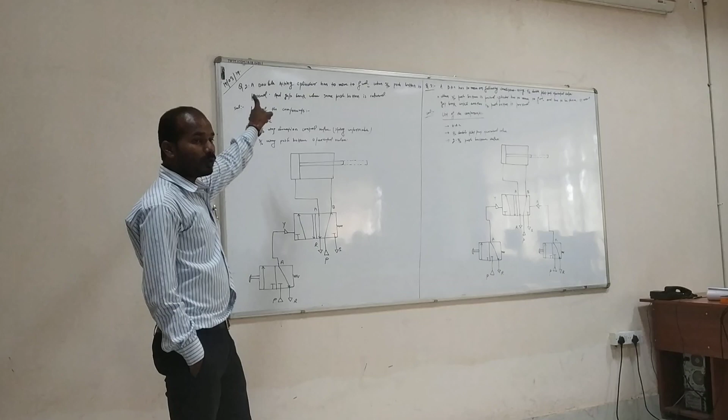So that is why we say there is a little change in the circuit, and this is what we are supposed to talk about today. We made two circuits and we'll see the difference between these two. First of all, before we start, I wanted to take you through this statement so that you could understand the purpose of making this circuit. Why did I make it?

This statement says a double acting cylinder has to move forward when the 3/2 push button is pressed. See, this is the state condition. When this component is activated the cylinder has to move, and it gets back when the same push button is released. So this is the statement. To fulfill the statement, what did I do? I made a circuit.

This circuit can be used for the same objective: to open the gate, to close the gate, to push any object, even for the sake of pick and place. These are the applications that can be performed out of this. So this is one example.

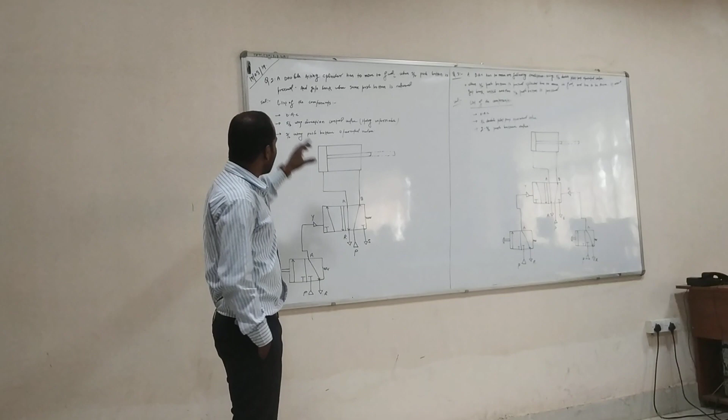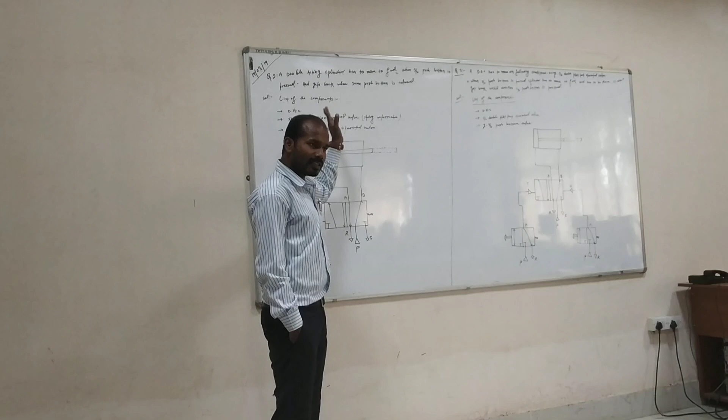Before making the circuit, we'll decide what components we require. That I did here, the list of the components. How did I confirm which components we require? Having read the statement, because in the statement things are crystal clear. A double acting cylinder has to move. So the output component is the double acting cylinder, and if it has to move, then some directional control valve must be there which will feed the pressure to the cylinder so that it could advance.

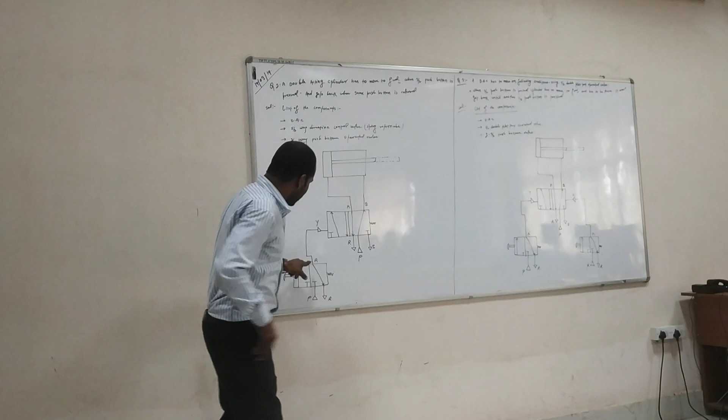So what are those components? It says 3/2 push button operated valve. It means the switching component is listed, but the directional control valve is missing from the question. So this is what we have to expect. The switching element is there, the output is there. This switching valve has only one port, whereas this has two ports, and this component has not been mentioned in the statement.

So how can one confirm? One can confirm by seeing these two ports, because the cylinder has two ports. So the component we require must have at least two ports, and that is the 5/2, because a 5/2 or a 4/2 has two actuation ports, but a 3/2 has only one. If you use only this one, how will you connect this output, which has two? That is why this interpreter must be in between, so that the connection can be established properly.

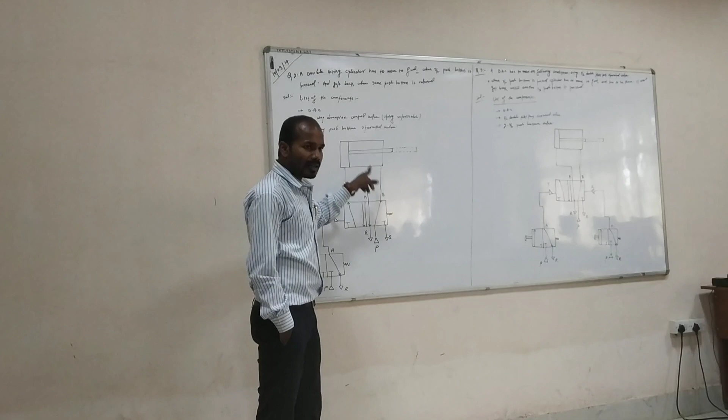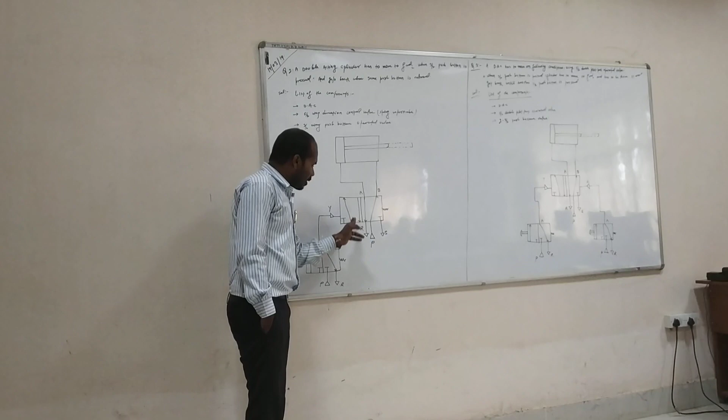Now the question arises, how will it move? You know the rest of the story, but I want to explain it. The moment you press, this state will override, P gets connected to A, pressure will reach the pilot, which will feed the pressure, and because of that this will override here. The moment it overrides, P gets connected to A because of this slant arrow. In the same fashion, because of this arrow, B gets connected to S.

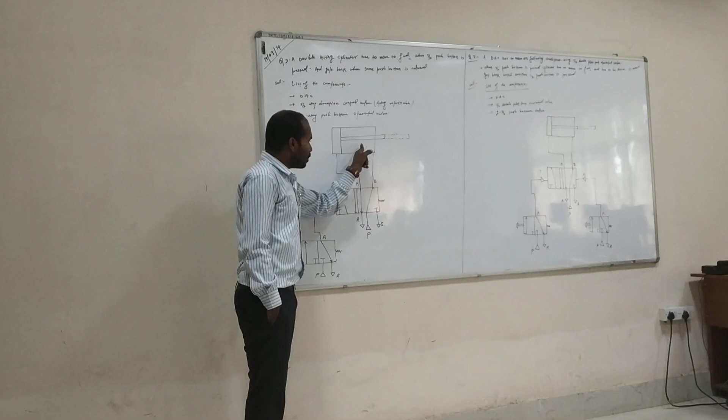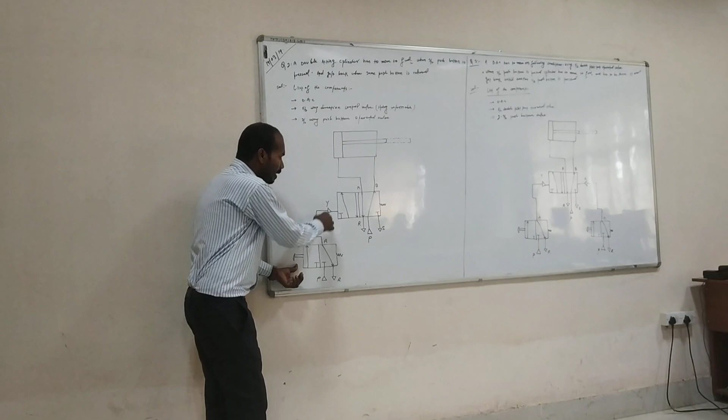So this pressure will be fed in this direction and act on this surface. Due to that, it will advance forward, and the pressure available in this chamber will release from B to S, and because of that the cylinder moves forward. But the moment you leave, what happens? It gets back to initial because of the spring, and the moment it gets back, there is no pressure here, and because of no pressure, this will act in the same manner. This results in the cylinder getting back.

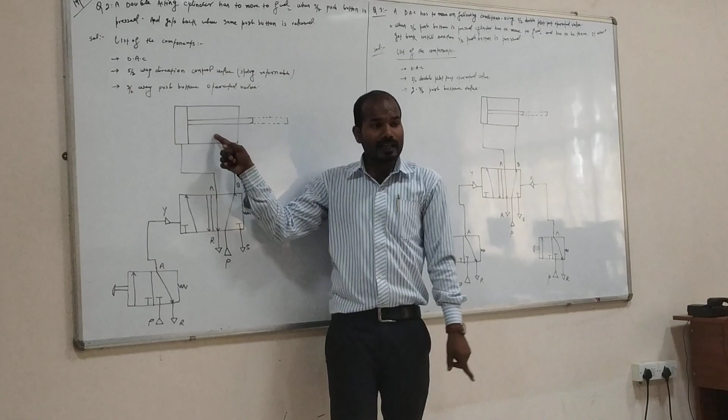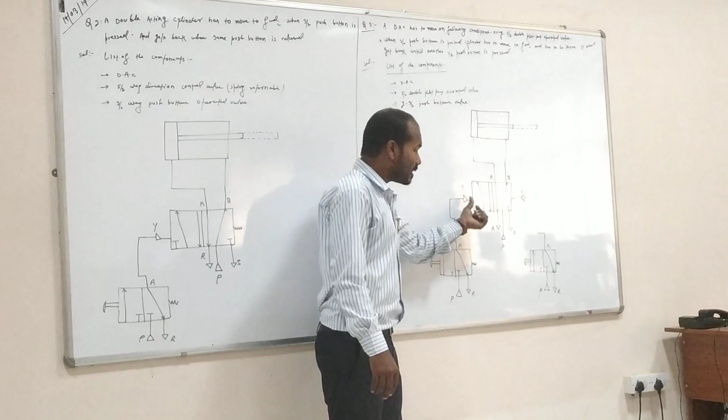In the same fashion this cylinder moves, but there is a slight difference. That one had only one switching element, but this has two. This has a double acting cylinder, this too has a double acting cylinder. One more difference: that was a 5/2 single pilot operated valve, but this component is a 5/2 double pilot operated valve. So what change will take place?

The statement says when the 3/2 push button is activated, the cylinder has to move forward and stay there. It means once you activate, it goes forward and will stop there, and will not get back even when released, like it was getting back before.

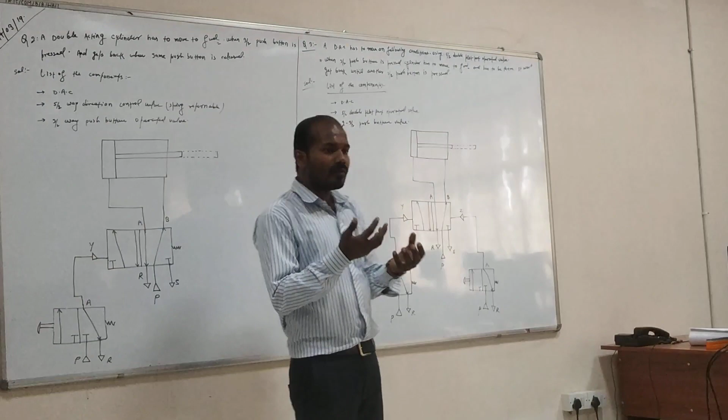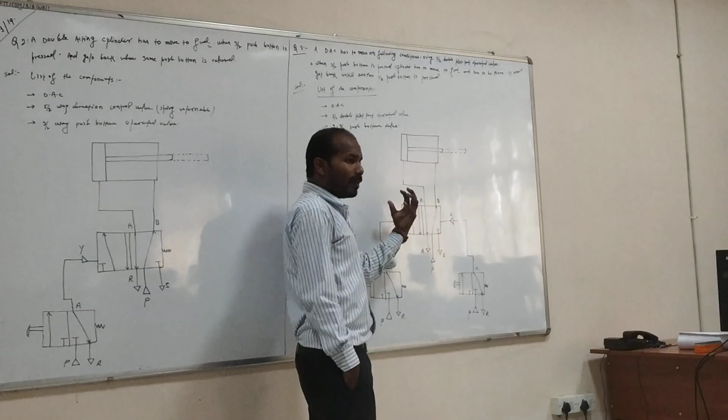So for that, what did I do? I took another button that will feed the valve from the opposite side, and because of that it will get back. So this element is fully responsible for moving the cylinder ahead, and this component is fully responsible for taking it back. And how this will take place, you can understand from the entire story.